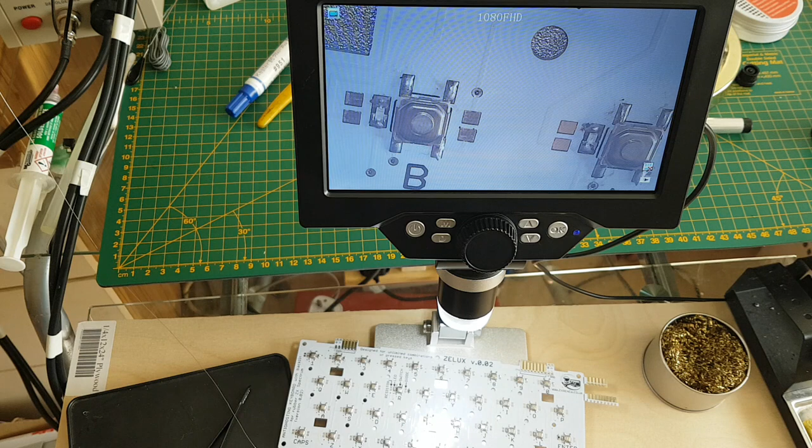Yesterday I did a live stream where you saw me soldering on the micro switches. Today I'm just going to do a little recording and show you the way I solder on the diodes. Because I've got a microscope with a 7-inch display on it, I can probably show more accurately and clearly the way to do it. I'll be soldering mainly the diodes on and maybe a couple of resistors as well.

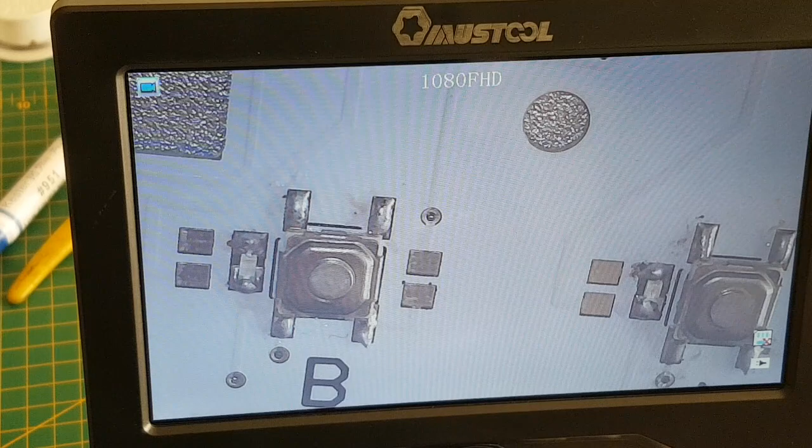So without further ado, let me enlarge the picture for you and show you a clear picture of my man at work. You're not going to need to see my hands moving, however, you will like to see the big picture of this. So if that's okay, slightly on a twisted angle, but you're going to get the general idea, so that should be fine. Once the camera steadies, there we go, that's going to be a pretty clear picture. Let me just adjust this slightly, and I'll try not to knock the camera while working. There we go, and away we go.

Right, as you can see, there's the LED keyboard just there. Just waiting for my soldering iron to warm up, which is here. And as always, good tip management is required. Just give a nice good clean tip. That way you have no issues in a bit.

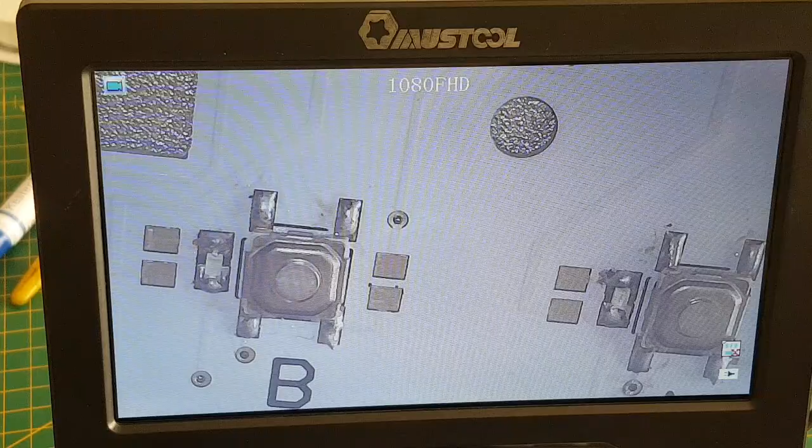Now, because I'm doing the diodes today, I'm going to get some diodes out ready. Once I find where I put them, that is. I do prepare these things, you know. And I think that these are the... Yep, the diodes, as you can see there.

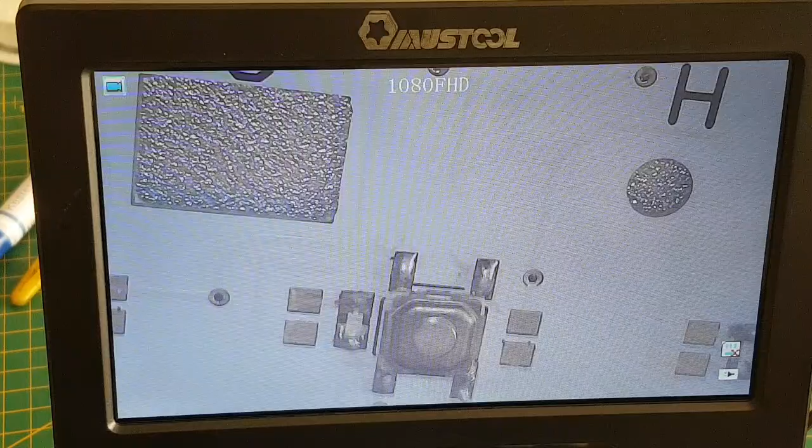They're indicated with their polarity. The line is the one that you need to put exactly on the board. Let me show you on the board. You see the line just there, indicated just there. Well, that basically is telling you to put this sort of that way round. Yeah, so you're going to be looking at doing that.

What I tend to do is I get these all ready by placing them out a little bit before soldering them on. So what I'll do here is I've got my little tray, a little black tray. I know you can't see much in a moment, but I'll just leave you that picture a minute while I just open them. Open a few diodes up really. I've never lost a single component in doing this, and I'm not going to plan to do it today just because I'm streaming live. There we go, that's better.

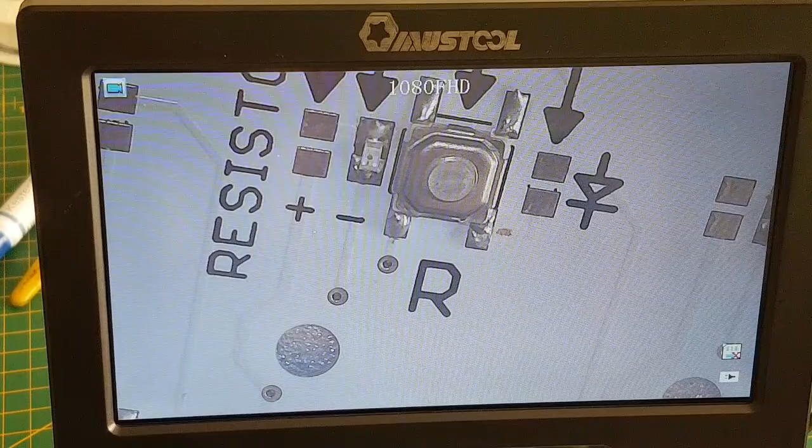Now, there's the components that I'm soldering in, and what I'll do is I'll twist them so they're all facing the right way for me to pick up. I mean, I can see with my bare eyes which way they've got to go. I don't need the microscope to do this, of course. I'm only putting the microscope there to give you a clearer picture of what I'm doing. So once I've turned a few over, that's it, ready. And ooh, there's one over there, isn't there? There we go. Then I'm ready to pick them up. So I'll just move that out of the way for now.

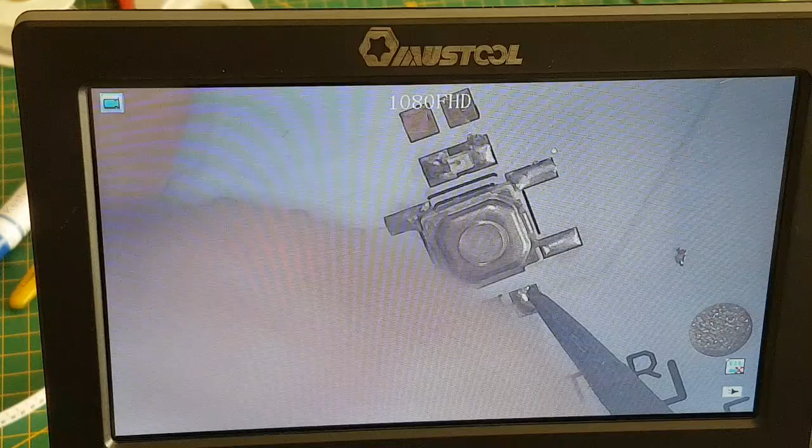We'll just start with E because he's in the picture. Simple trick to do this is to get your soldering iron. Let me just free the wire. I've got the wire trapped there for a minute, and drop it onto the pad. Just give it a second or two to heat the pad up. Then place the solder up to it, and it'll fill the pad. Whoops. Quite nicely. Once I get it in place, there we go. See that? And you get a nice little blob there.

Once you've got that blob, just add a bit more solder to that, just to make sure. It doesn't matter how much solder you add, you can't really go over the top. There we go, that's better. That's a better blob, isn't it? Little blob of solder there. Then using my tweezers, which are these devices here. It's always good to have a good pair of tweezers, especially, you know, try not to get them magnetised.

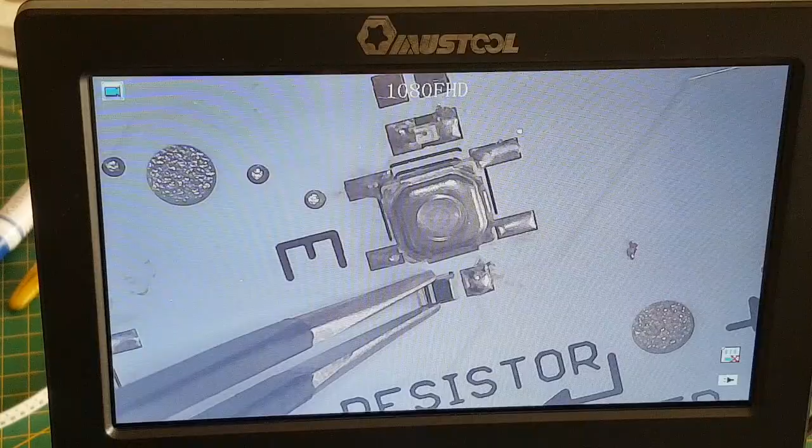Now, the important thing is to get it in the right direction. Place it down on your... Yeah. Now, the simple thing is just to plonk the iron straight on top of that blob of solder, like so. And as soon as it goes flux, see, just shove that in, do it like that, and then just pull your solder away, and it'll dry. And you can see how strong it is. I'm just going to move that. You know you've got a good grip, but if you want to be a perfectionist, you can really fill the pad up with it.

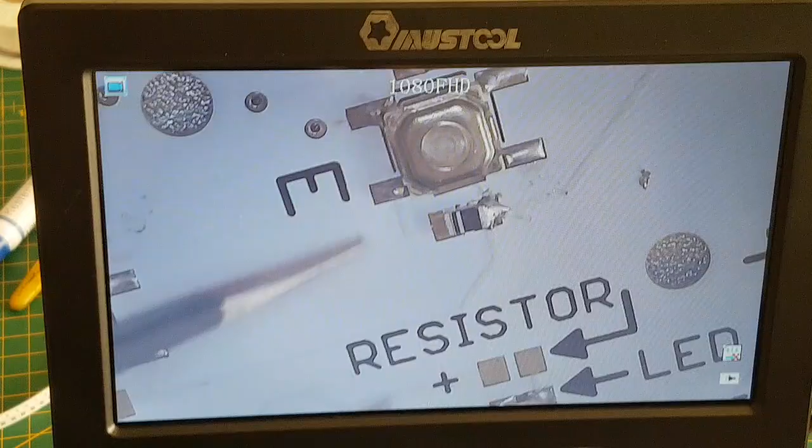Anyway, that's a good strong hold. Under the microscope, that looks like it's a spike, but if you put your finger or thumb on it, it's as flat as it comes. It looks like a spike, doesn't it? But it's not—it's just the way I've pulled the soldering iron away.

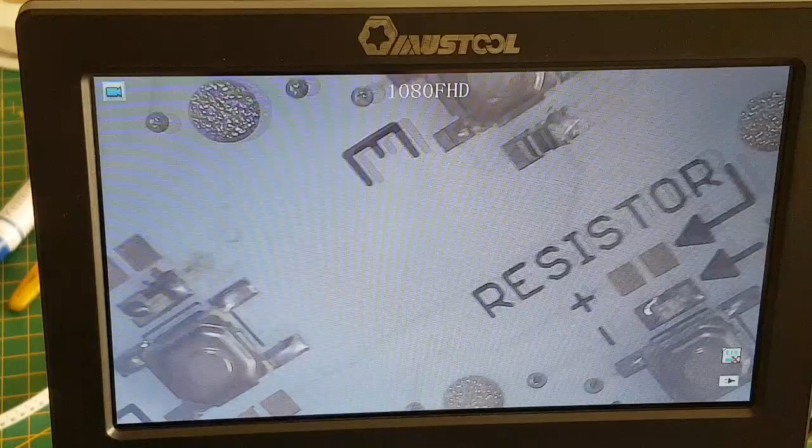So that was the easy part of that bit. The harder part, of course—you rotate it round to suit yourself—is doing the other side. Now there's a couple of ways to do this. For instance, I tend to put the solder up to it like that, place the soldering iron on top before it, and then just go into it like that.

And you can just rub it across a little bit, and then you get a nice—see that? Once that side's done, if you want to reflow that side, you can. And there you go, you got a nice little ramp either side there. So that's that one.

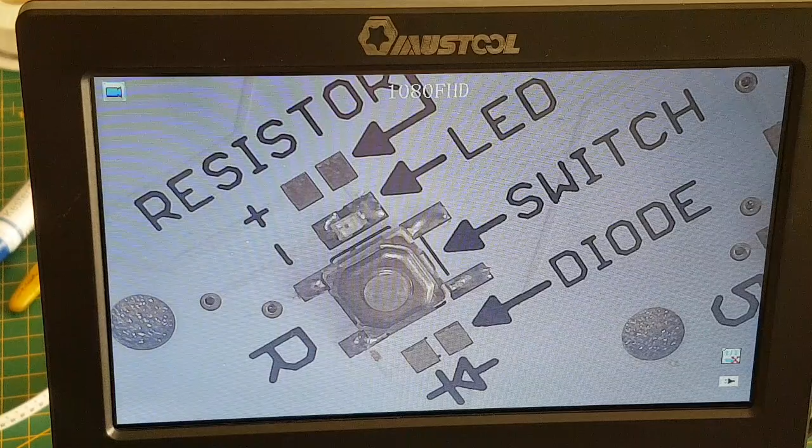Once again, we're going to move into that little diagram you get. The resistor I'm going to put in—each resistor varies to what colour LED you're using. You'll have a different resistor. For instance, the blue LED uses a different ohms resistor, and so on and so forth. But you'll see that as I go along.

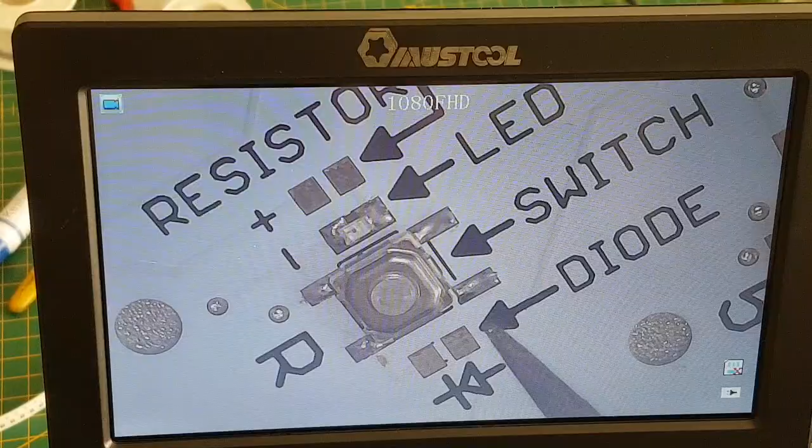So once again, get your soldering iron in place, drop that down there, heat up the pad for a few seconds, in you go—see how it fills the pad up—and pull away. And then you've got a nice little blob of solder.

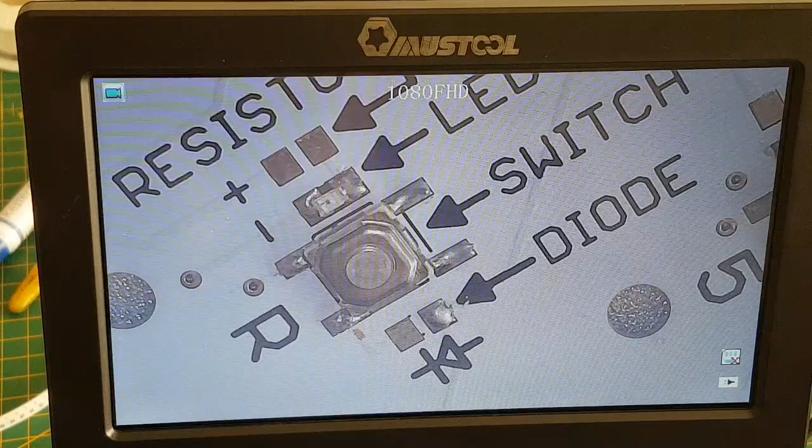So I've got sticky fingers today. It's all the flux—it gets on your fingers. It's not only the soldering tip you have to clean—sometimes you have to clean your fingers as well.

Okay, now place that in place ready. Preparation, as always, is the key to success. Just drop that on top of there like so. As soon as you see it get molten, give it a few extra seconds if you want. Just shove it in, pull away. And there you go, look—a nice, good, solid, strong hold. That's good continuity there.

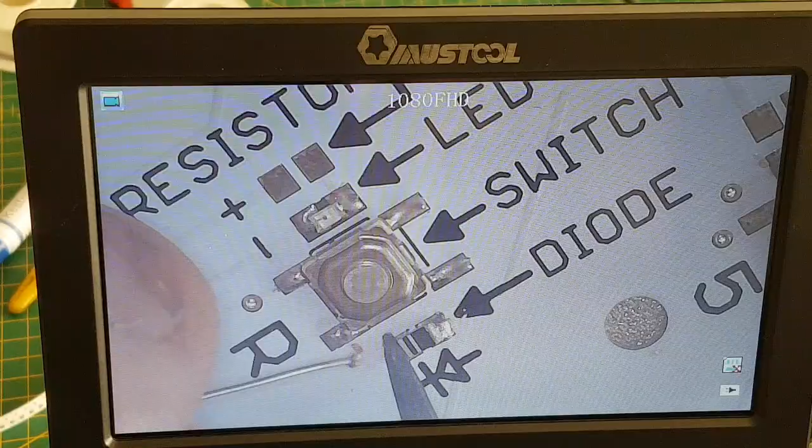And there we go. So it's as easy as that. Move on to the next one.

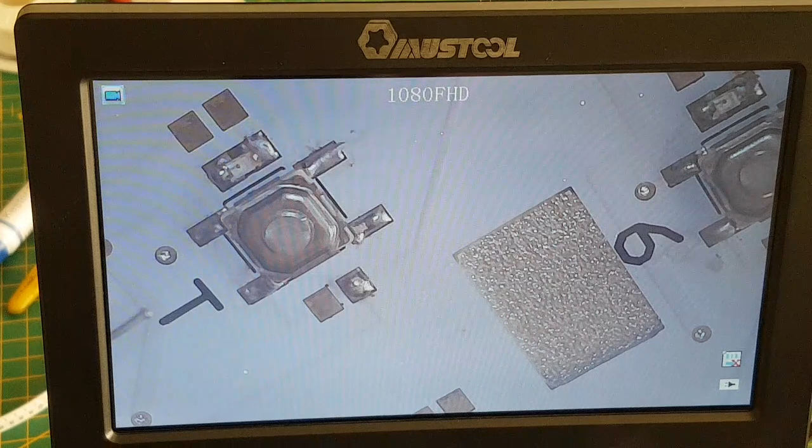Because I've got all these diodes twisted round the right way, it only takes me a few seconds to pick each one up. Once you've done that, I'm on T. Oops, just trace that one later. Oh, there it is—that was easy, wasn't it? It's only landed back in the tray.

Oops, try not to bash the camera too often with my head. Drop that down there, push it in, pull away. Oh, there you go—that's nicely done.

You can go all the way along and solder one side at a time, but I tend to just do them as I go along. So you can use the tip tin—it sort of flows round your soldering iron into place. And there's your T done.

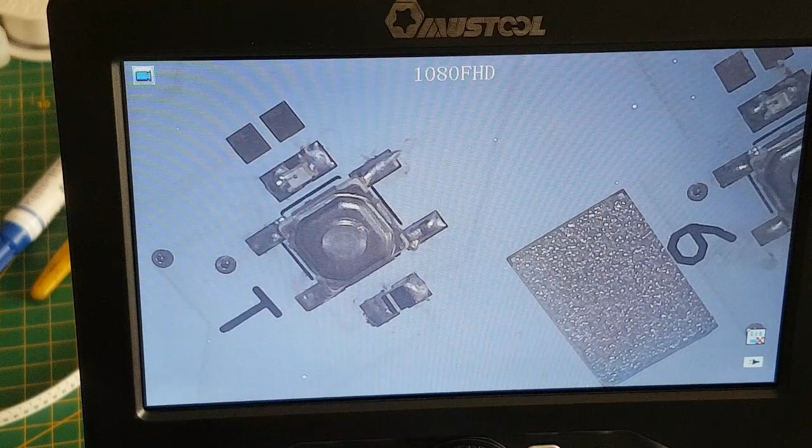So let's move down to Y—and why not, sorry about the pun. Once again, soldering iron onto the pad, take your solder up to fill the pad. Don't be scared to shove the solder on—plenty of, a good blob of solder doesn't hurt anything.

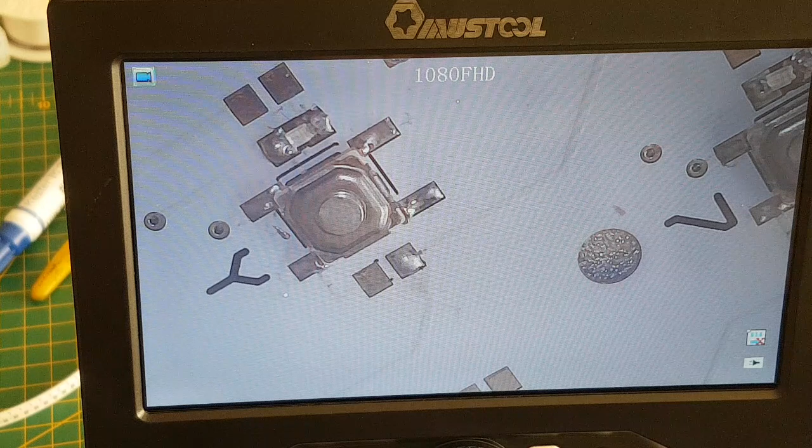Just turn my tray with my diodes on around a little bit. I've got the tray on a slight slope, you see—makes it easy. Oops, not happy with that.

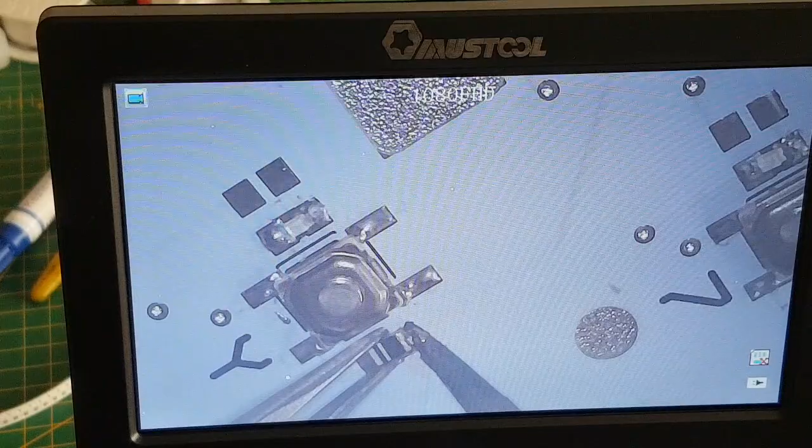I like my tweezers to be at the end, like that—see that, I've got it at the end. You can see the little silver pad that's going to be biting into this solder in a minute. There we go—it's nicely done.

Remember, once you get it tacked into place, you can always reflow it if you wish. There we go, and I'll just reflow that for you. Whoops, we don't want a spike, do we? There we go—it's a nice little ramp either side. And that's what you aim to get.

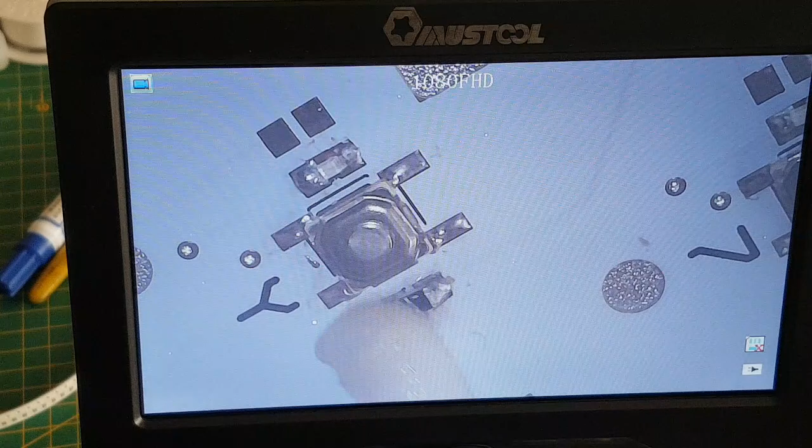And of course all the flux residue—if I quickly show you, we'll clean off with a bit of IPA. Have I got any buds handy? I have indeed, yeah—dirty ones at that. So it looks messy, doesn't it? Yeah, but once you've—where are we? White. Once you get a bit of IPA in it, look, it'll clean up just nice and it'll look really smart.

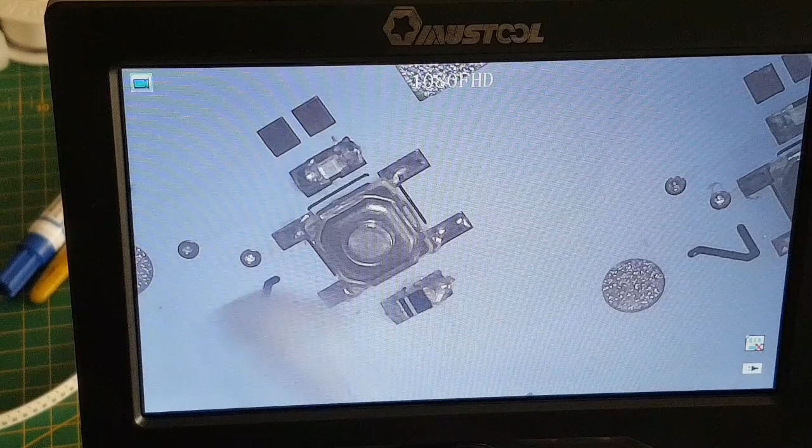There we go. I'm going to put them in a bath in a bit, and of course dry it off a little bit.

Once you've done that, if you want to reflow anything - I'm looking at that LED, there's a little spike there. I don't think it's going to affect anything... actually it's not really a spike, there's nothing there, it's just a scratch on the board. There's a little track that goes across there. Let me show you - there's a little track that goes from that pad to there, and then down there. So you go up there, that hits your resistor, there's your resistance into your LED, down, and that's your test hole there. There's a little track there, and the white has come away, revealing the track. Other than that, the LED is nice.

I can actually show you that working in a minute. I haven't changed my battery yet in my meter, so it shouldn't do it any harm.

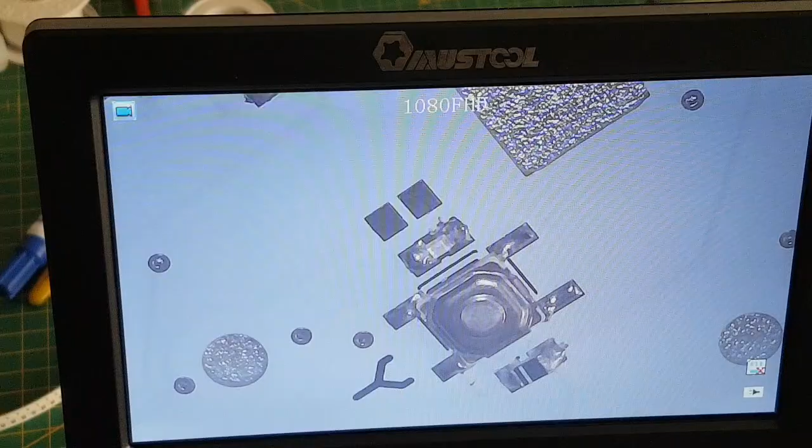Where are we? We're on Y? Okay, so let's just put the positive there. And there's the test hole for that, and there's your light - that one's the green one.

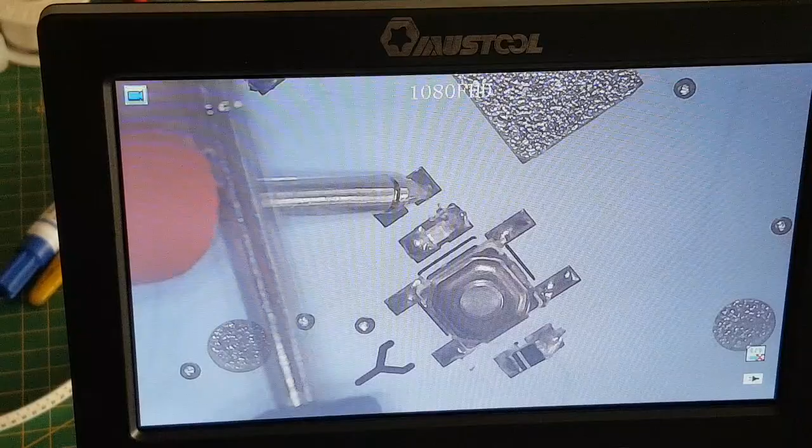That's the way I test the LEDs. The battery is absolutely gone in my multimeter, that's why even that little LED there wasn't even enough power. But that's good, because I don't want to burn any LEDs out, so I like a flat battery. Otherwise there could be too much power out of a 9-volt battery - you don't exactly get a true 9 volts, you probably get about 3.5 volts through it, so it's not a problem.

Don't quote me on that, of course. I'm not 100% sure, I didn't make it.

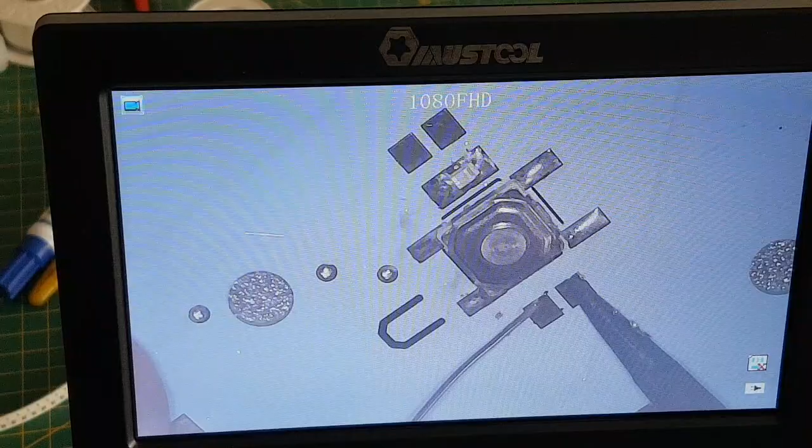Whoops, don't worry about that little bit that just flicked off, that will just blow away. Look, you just blow it away. Well, almost. Where were we? We're on you, aren't we? We're on you.

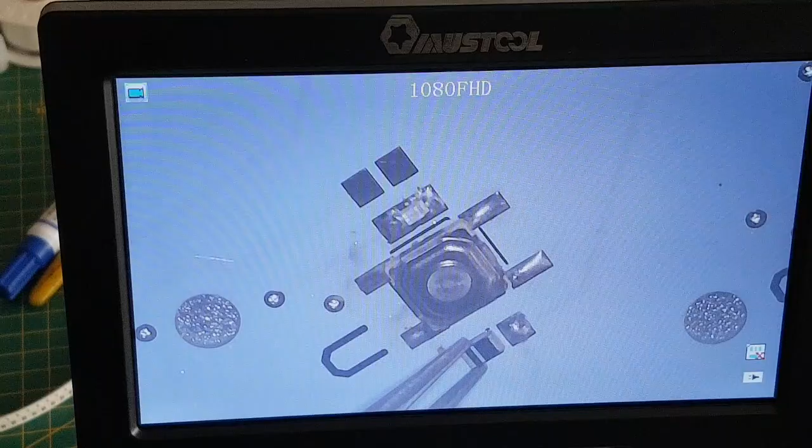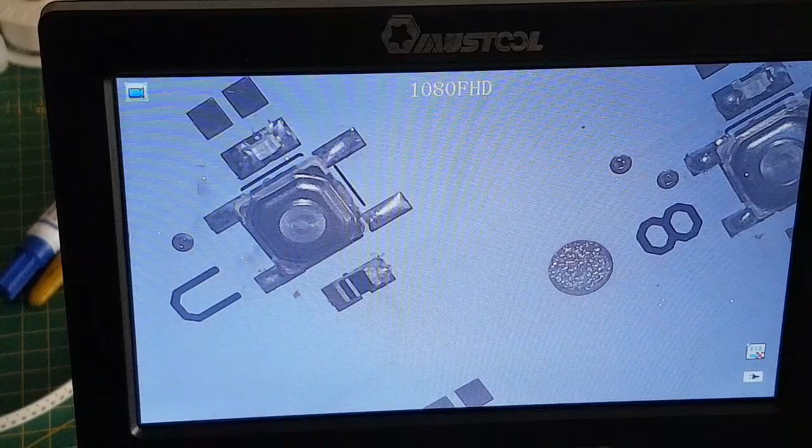As I say, preparation's key to success. Get that ready in place. What I do here is apply a little bit of force when pressing down, because nothing's actually strapped down. Let me put that in the centre. Drop your iron on top of your solder, let it get molten, and once it's molten, push that in - you can push it gently or give it a good shove, then pull away. Once you've got the grip, look - nice grip. All these little solder bits that might flick off, you can clean up later with some IPA.

There you go, that's a lovely job, isn't it? Beautiful - much like myself.

Does he love himself, this kid? No, I like being ugly.

Right. People let me out in junctions when they see me, they feel sorry for me.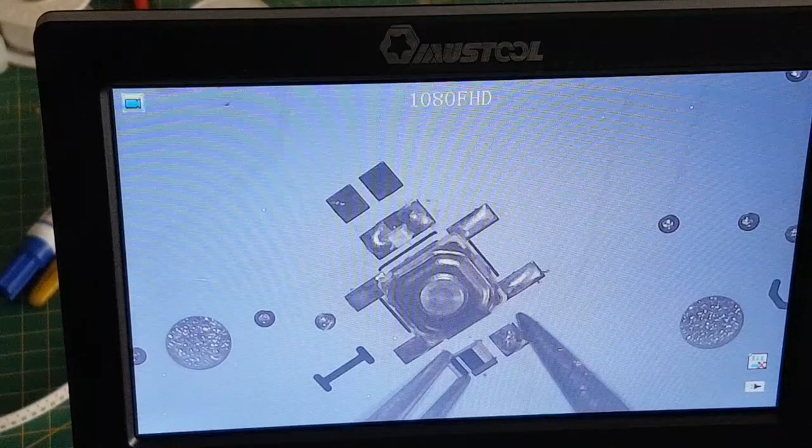There we go, just let it heat up again. Oh, it's doing nicely actually. The only problem I've got is I'm slipping all over the shop. See how it suddenly instantly takes? I like that.

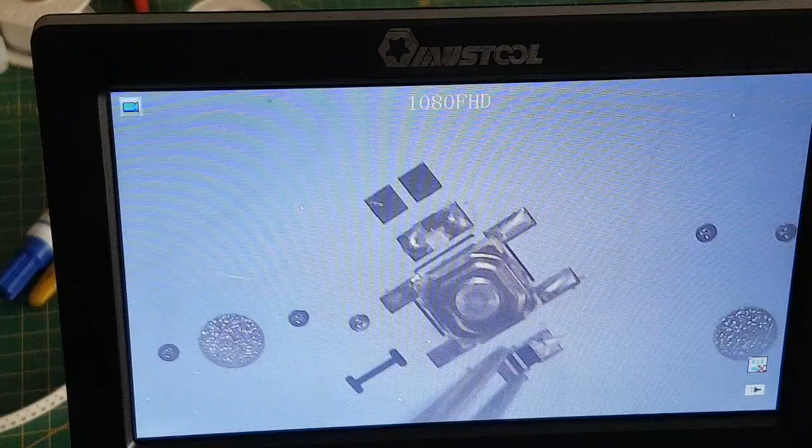I've got my solder wrapped around all sorts here. Well, bit of an eye opener this, isn't it, eh?

Well, I wasn't pleased with that, that didn't go too well, did it? There we go, that's better. Just reflow that other side. We'll leave a spike there for you - there's no spike, it's flat, it looks like there is but it isn't, it's just the last little bit. Don't forget, we're under a very powerful microscope, and it can make anything look hideous, but to the naked eye it's a really good job.

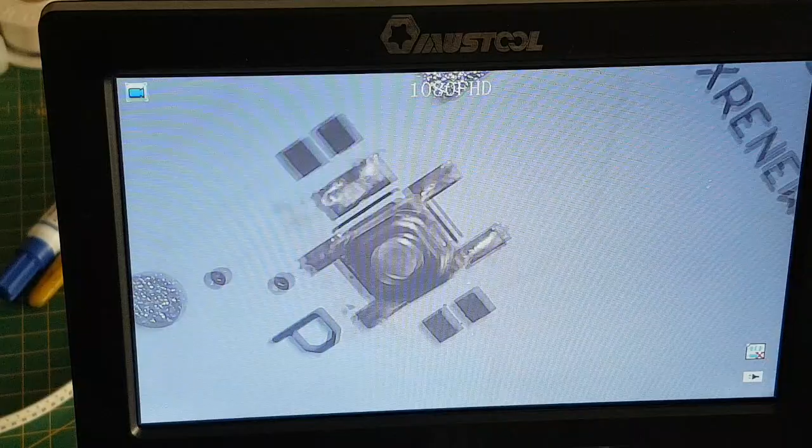Now, on the pad, fill the pad up with solder. There you go, so that's the way it should do. You can go along and do a few if you want - it's good to do it that way as well because your soldering iron stays nice and fluxy. There we go, two ready to do.

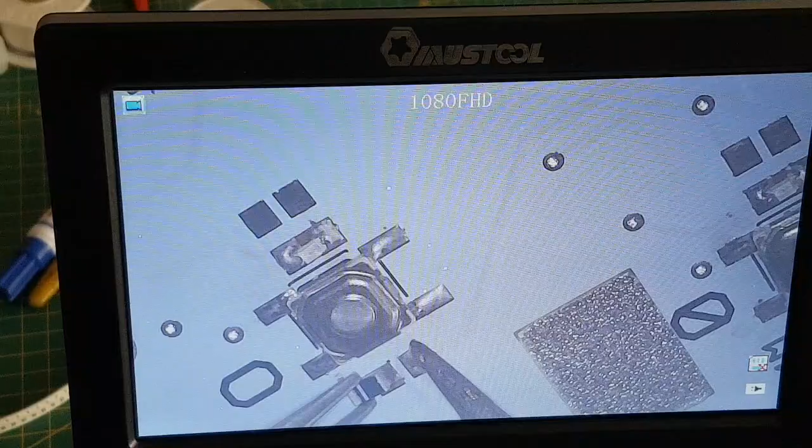To be fair, diodes, the smaller components, are now quite resilient to heat, so you do have time. But don't forget, you're not actually putting heat on the diode here, you're putting it on the pad. So your diode just simply goes in, like so, and pull that away. Once you get your soldering iron in place, you push it up to your soldering iron, and it sort of acts as a stopper.

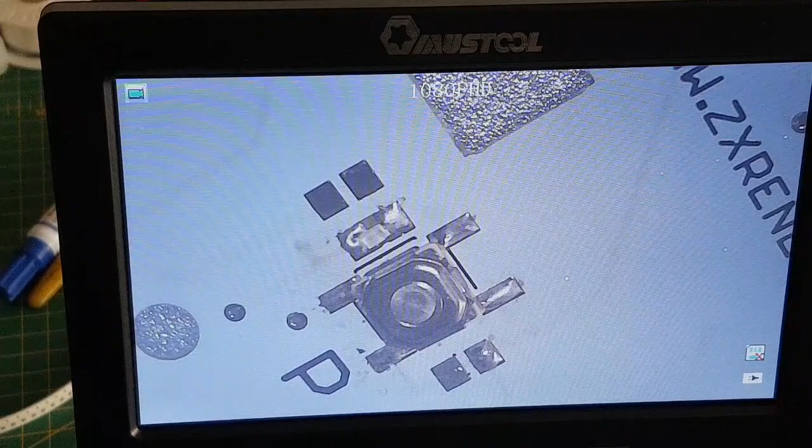Doing more gaming videos. Tried a little live stream last night for the first time in ages, just me playing various games. I was in a good mood.

It was a great achievement on the Kickstarter to get 1.5 mil with still 3 days to go, and now it's counting down in the hours. That's a nice result, a lovely little result there.

That is actually quite good soldering on that LED, believe it or not, even though it looks so bad under a microscope. It's got really good continuity. With the LED I try to put as little solder on as possible, because big blobs of solder either side will stop the light from escaping. The more light they can get out, the better the effect on the keyboard.

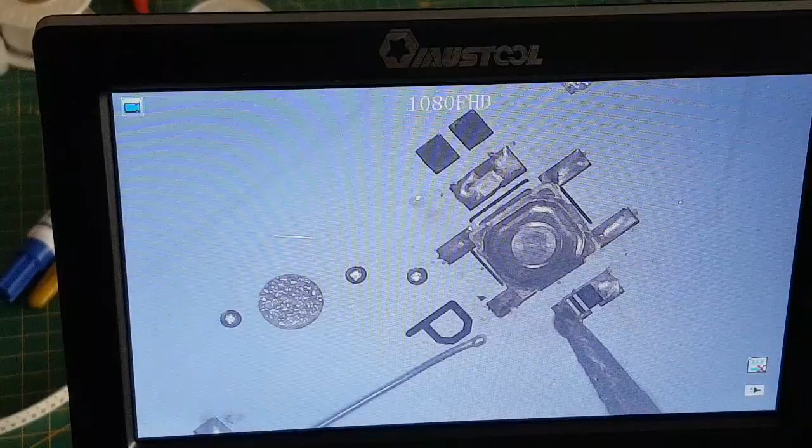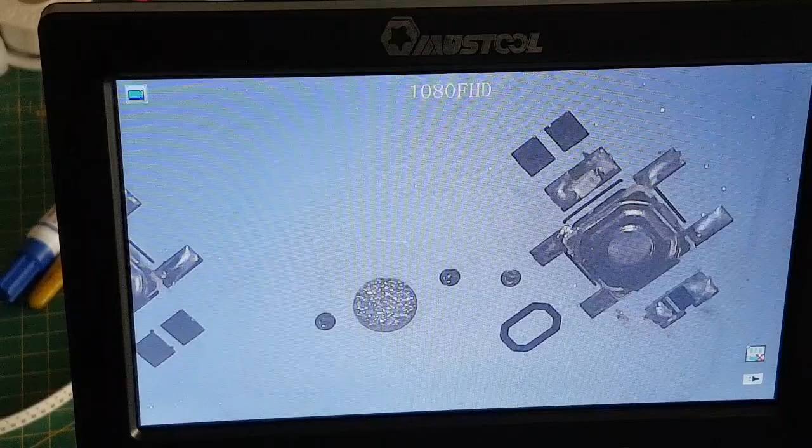I'll have a peep, please, Bob. Oh, that one didn't take, but don't worry - if there's solder on the soldering iron, it'll take it off and put it on. Add a little bit more to that, I wasn't too happy with that. There you go, a little wiggle left and right helps sometimes as well. You can see the line, so you can tell they're all in the right way.

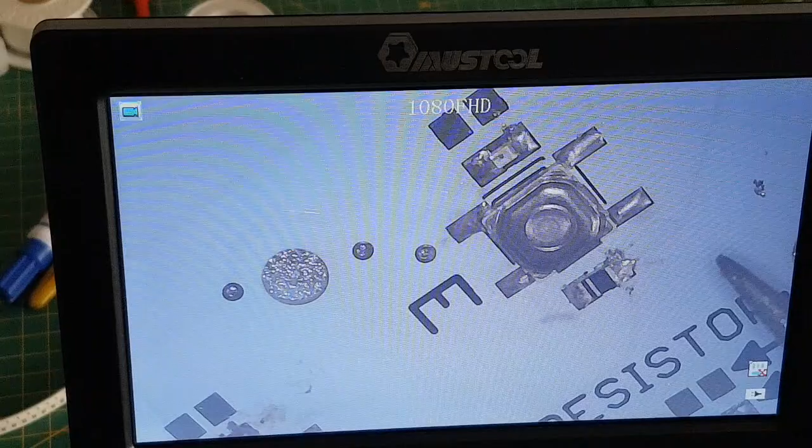That looks a bit messy, doesn't it? But as I say, once you clean it with IPA - if you have any doubts at all that it's clean, give it a good clean with the IPA using an earbud, and that'll give you a better picture of how clean it is.

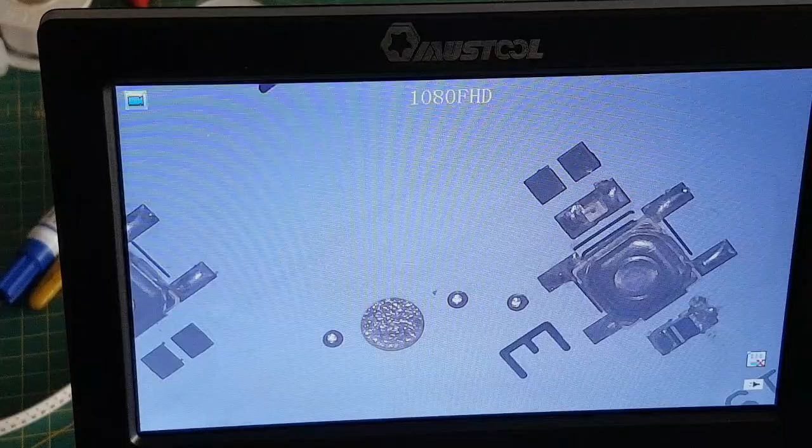Once I put it in the little bath that I've got, you can see the track there. Let me just show you - see that there? There's a little bit of the track underneath that goes across, and when you've soldered that, a little bit flaked off, that's all, a bit of the shielding, but that doesn't matter because it can be linked quite frankly.

But that's that done, so let's have a look at what we've got left to do. We've got a W.

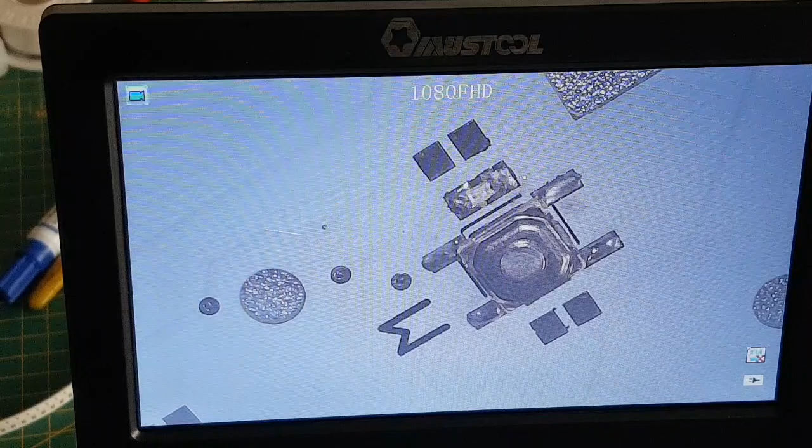Now there we go, see how that just took away the solder that was bridged against the two there.

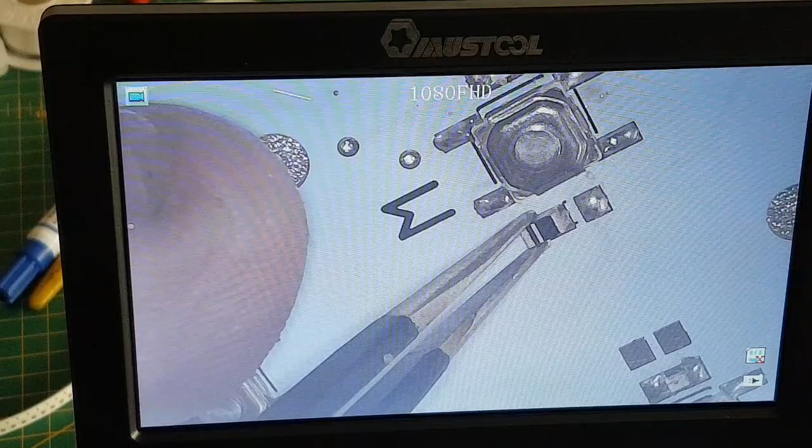And if you enjoy it and people like listening to your content, then that's good, some people do. For instance, I do like watching Techmoan, I think it is - he talks about his different hi-fi equipment and old forgotten sound formats, so I've subscribed to him. I do like watching Nostalgia Nerd too, although he almost looks a bit too professional. I like a bit more raw, bare bones, what people are doing for themselves. He's good, don't get me wrong.

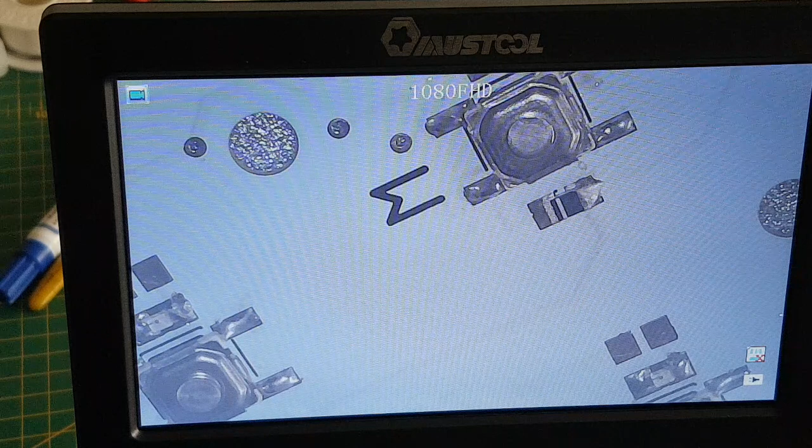Common sense is something you either got or you haven't, because there are a few idiots around unfortunately. When I say that, people who decide to go and burn 5G masts because they think it's the cause of the coronavirus - well, let's be honest, they're idiots. So I like people that talk sense.

And where are we, what letter are we? Oh, Q. Oh, that's cute, sorry about that. Oh, where's my solder gun?

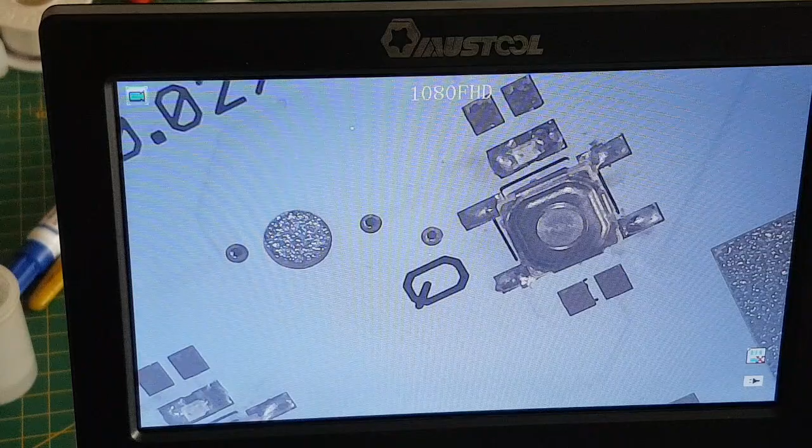Before I add the solder to that, I need to cough, excuse me please. Don't worry, you don't need to have a mask on if you're an idiot watching - oh no, I'm going to catch corona over the internet. No, you're not, because first of all I haven't got it, and secondly you can't get it through a screen. There's probably somebody out there that actually thinks you could get coronavirus from somebody coughing on TV. There's always an idiot somewhere.

Most of the people that I work with think I'm an idiot. Of course they don't. I don't think I'm that intelligent to be an idiot.

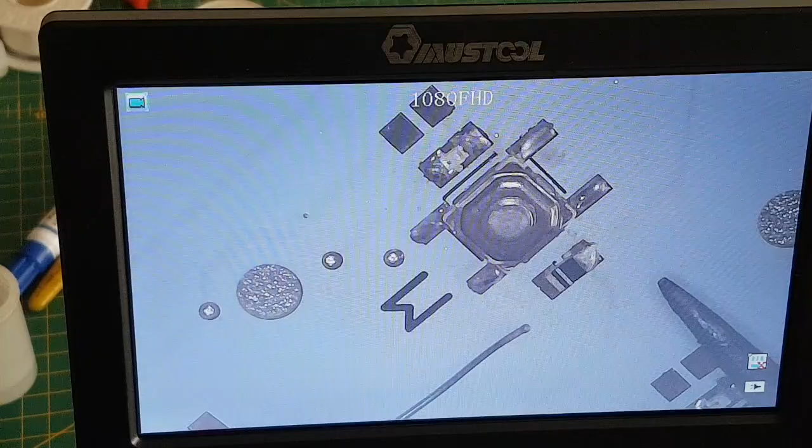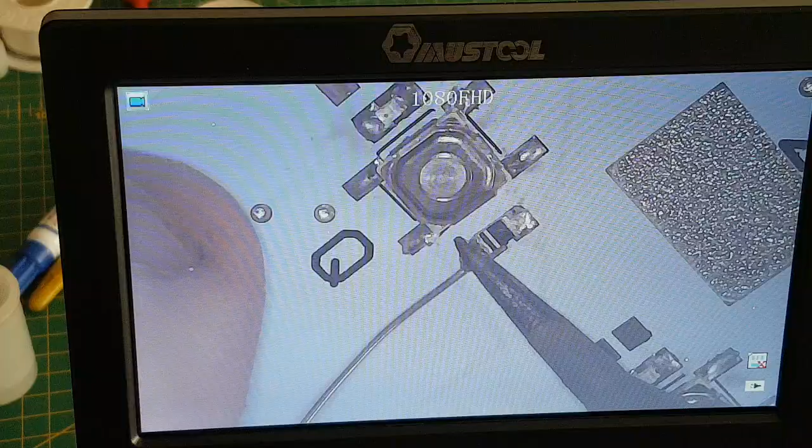Right, here we go. It's going rather well, isn't it? Let's get the diodes on. I'm going to get the resistors in place. I'll at least do a couple of them because I don't want to make this video too long. That was nicely done. See how beautifully that is done. Nicely done, nicely done, well done, Wayne.

So it took you years, you're getting quite good at this. These kits are from Pete from ZX Renew, just showing you how easy they are to do. They are enjoyable, without doubt.

If you want to spend 5 minutes relaxing, just solder one of these up. It's, you know, I enjoy it. I don't get a backache or a neck ache because I'm not leaning down anymore, but I'm a fairly fit lad for my age. Fit as in healthy, not in looks.

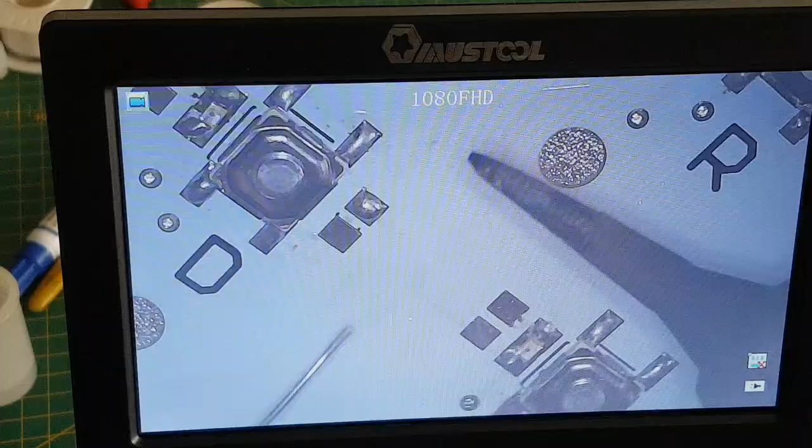Bald is beautiful. The way I explain baldness to people is, listen, we've evolved from apes. And apes had the maximum amount of hair, and bald people have got the minimum amount of hair. So that just means I'm further along the evolutionary scale than they are. So hairy people out there, you're a few million years behind me. Or 1,000. A few thousand years behind me. If you've got hair, you're behind the times.

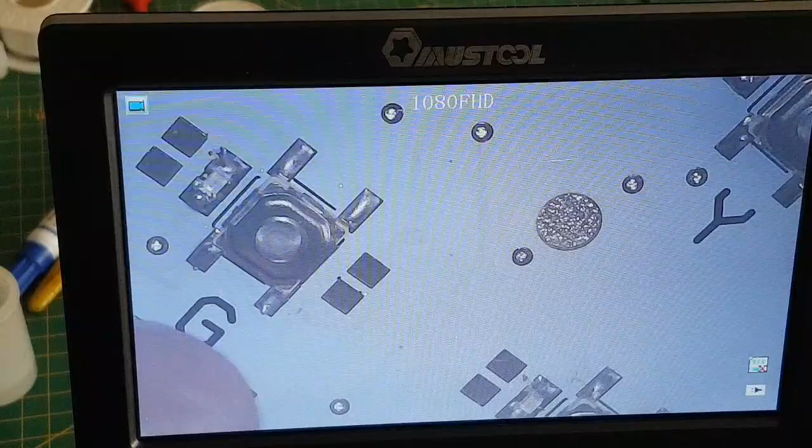I want to know, somebody said to me, you either go bald and balmy or grey. Is that right? Bald and balmy, or grey. So why do the bald people get the balmy as well? At least the grey people can dye their hair, can't they? Oh well.

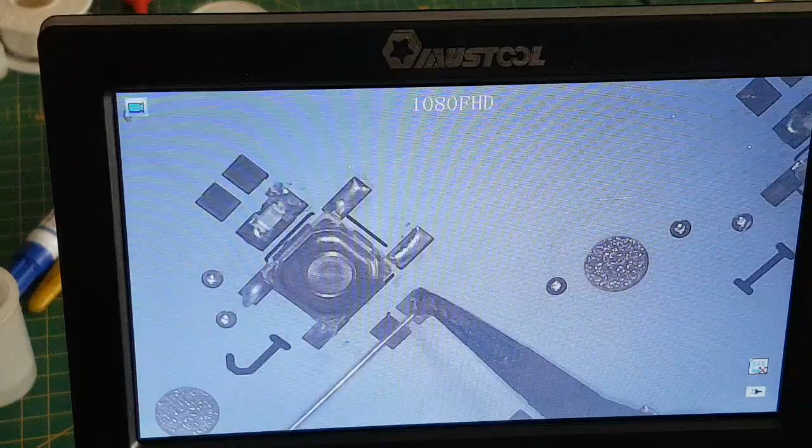I'm just tinning one pad, ready, so as I don't have to worry about doing it in a minute.

Lovely. I had to say a word related to weld, didn't I? Hey. I know I shouldn't entertain that. I do apologise, it's just my sense of humour. It's ridiculously stupid, like myself.

So here we go, look, I've done each one, one there, one there, one there. Whoops, one there. The problem is there's like a bar on this microscope that gets in the way sometimes, you know. Once again, preparation.

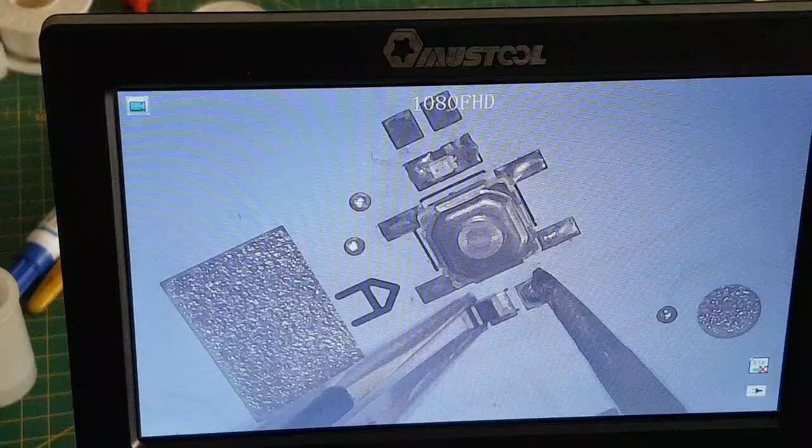Where are we? We're on S, are we? Have I done an A? I haven't done A yet. Okay, get that into place. Bring your soldering iron into place, drop it down. As soon as you see it go molten, in, out. There you go, nicely done. Just reflow that, shall I? In, out. There you go. That's better, much better.

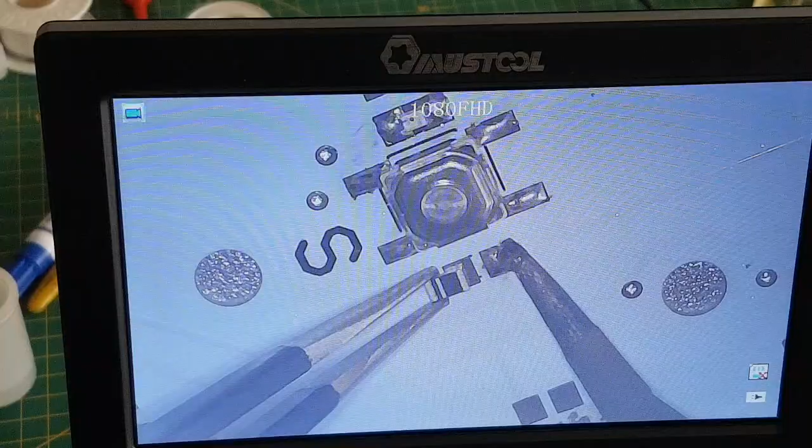If you're wondering why I'm not doing it as fast as possible, I haven't. I normally put all these in the right way around, don't I? In. Of course, you don't have to re-add solder once you've got it in.

Oh, that one's going to get... Oh no, I can just about get to D, can't I? Hold on, D is a bit awkward, the bar's in the way. Why is D awkward? Ah, okay, let's just do it that way. That's it, that'll do me. Doesn't look to be enough solder on that, but we'll find out in a moment.

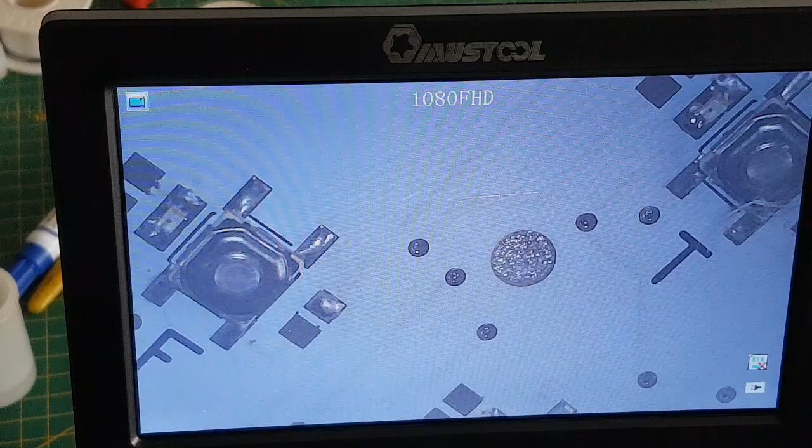That's nicely done, and I've done it for D. This one's going to be a fabulous job. See what I did there? Fantastic.

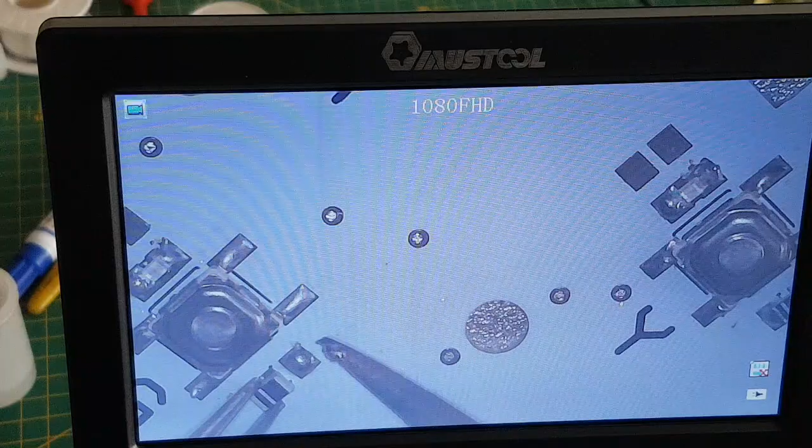Okay, I'm on the G for the diode. Could be a good job or a great job. There you go, it's a great job.

And we're going to get one for H. I'm just twisting the diode round at the moment. In we go, away we go. Beautiful, much like myself. So, let's have a look.

Oops, I've just headbutted the camera again. There we go, shall we do that? A? No, I'm saying I'm doing A, not asking a question.

Whoops, turn it. So you can do that as well, if you've got solder on the tip of the soldering iron, you know. Whoops. The D was the hard one to get to, wasn't it? Didn't need to put solder on that then. Sometimes you've got enough solder on the soldering iron itself.

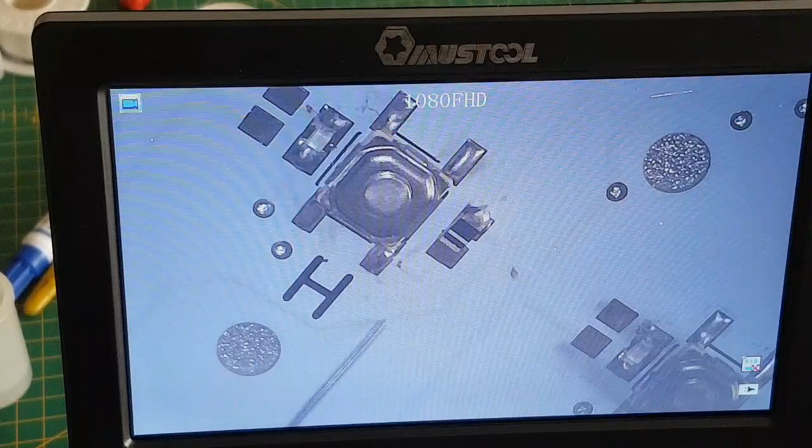Just pulling a bit more solder through my fingers. Yeah, that's nicely done.

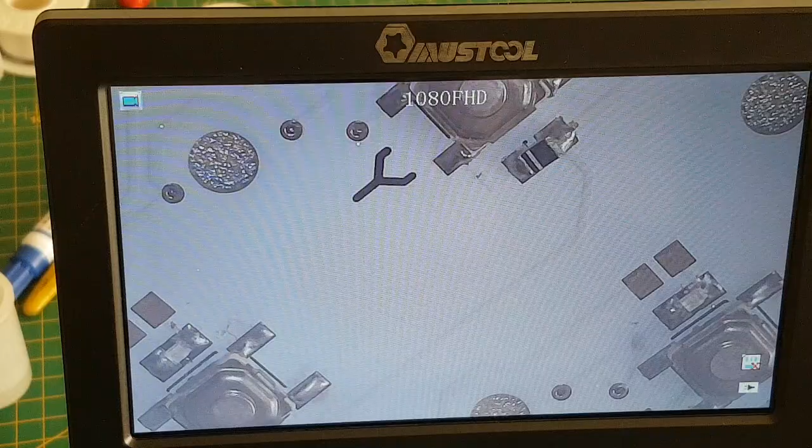JJ, so I've got to get some more diodes out, have I? Yep, got a few more diodes to put out yet, quite a few to do actually. But I won't concentrate on the diodes now. I'm going to put a few resistors in, show you a few resistors before the video gets too long. It's already up to 31 minutes and you don't want to spend all day watching me soldering resistors in. You want to see me doing something else, so something else is what I'm going to do.

Where are we? We've done H, we're up to J. Let's plonk that there, in, out. There we go, beautiful. Better kick along with this. Oh dear.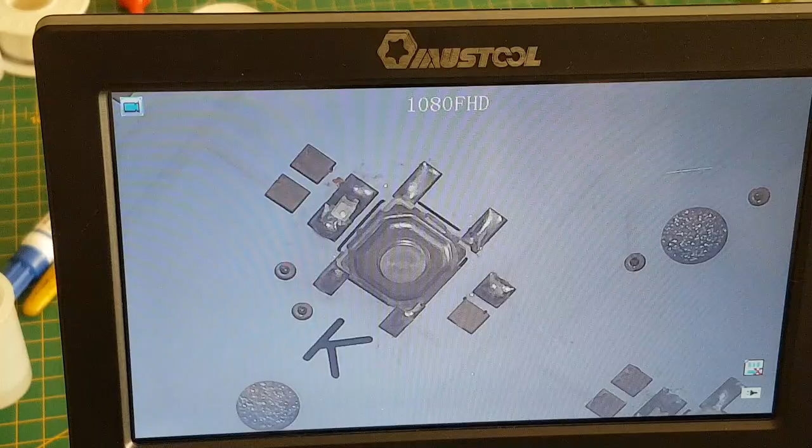I know what you're thinking - why are you still watching? And I'm thinking the same.

Beautiful, beautiful.

I think that's my phone's alarm telling me to wake up. Good timing that, isn't it? Lovely timing actually, got one in, got one in. Yeah, lovely timing. Right, where are we?

Didn't I do enter last time? Ah, oh yes. Oops, no, that doesn't look right, does it? Oh, I see, I just need to reach up and press it down. There we go.

Yeah, it was standing up a touch. It's standing proud, is it? No, it looks like it's standing proud, but it's not - it's quite level.

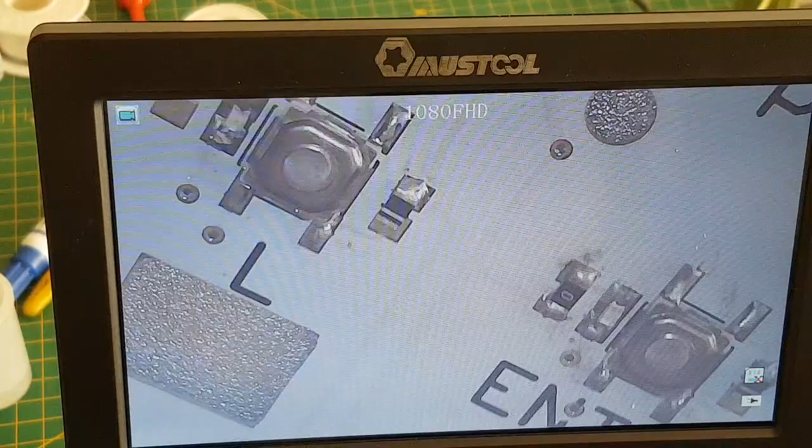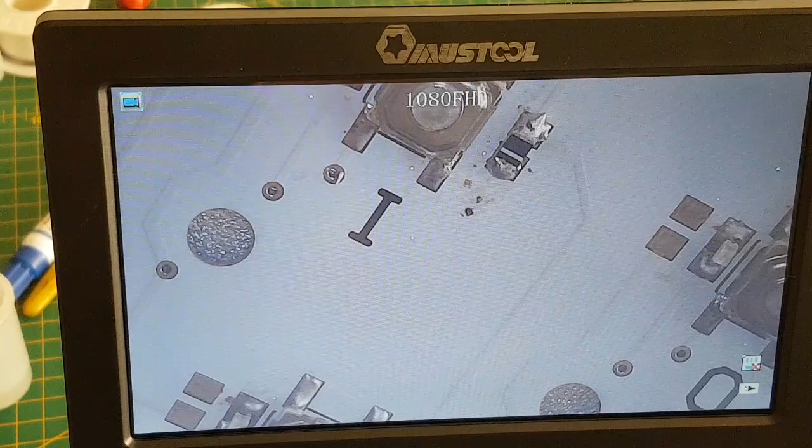Just a minute, let me stop you from ringing please. Hello? Is this 1111? Can you ring 9999 because my finger's stuck? Oh, old joke - the days when you used to have a telephone that you put your finger in and dial. Oh dear me.

Oh, here we go. That was nicely done, wasn't it? You know, on the microscope you sometimes can't tell it, but the solder is actually facing upright, and I'm trying to put it to the ends and I'm nowhere near it. There we go. I thought there was enough solder on there, sorry, my mistake. There we go.

Now when it starts to run up the soldering iron, you've got to give your soldering iron a clean, because the solder wants to run up to the hottest part as always.

Have I done J? No, I haven't, have I? There we go. Oh, I don't like that. There we go, reflow it, nicely done. Okay, have I done K? No, I haven't.

See how it took then? It takes it off the soldering iron if you get it right. You know you've got a good connection when it just sucks it towards the pad, like that. That's what you want to do, is get it to suck towards the pad. Nicely done. And I think I've done that one, haven't I? Yes, indeed I have.

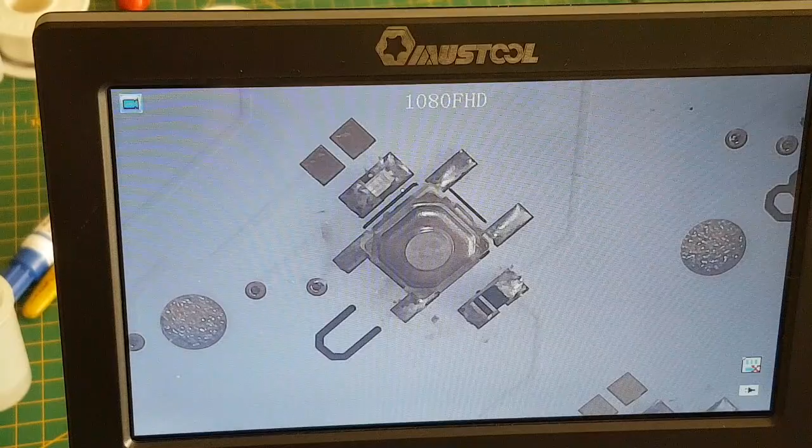And the resistors we've got, I'm going to do the red ones. I've got them marked, look - they're for red, and they are. I'll just zoom in on that for you, and I'll try and keep my hand steady. Right, here we go - whoops, wrong way.

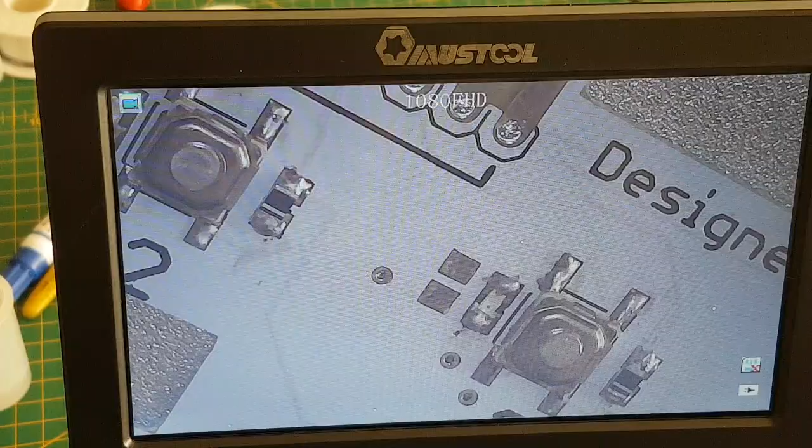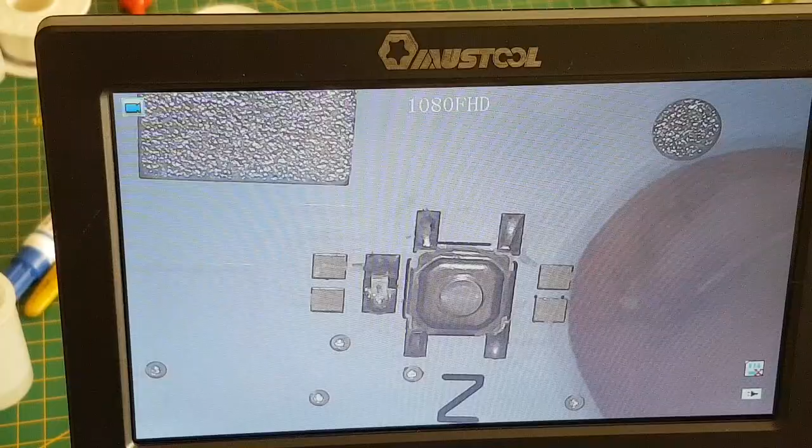There we go, and that's for the red, which are the red ones, which is going to be caps. And if you're not sure which ones are red, just test them, doesn't hurt - for instance, like the caps one. Have we done caps yet? There we go, there's caps, look. There you go, there's red there. A should be red. S should be red, I believe - no, I don't think S is red, sorry. W should be red.

Yep, there's my battery gone in my multimeter. And then it should be 3, 2, 1 - 3, 2, and I bet you know what I'm going to say next, don't you? Do we get a dusty bin? Only if you make a real mess of it - gets to go in the bin.

There you go, that also lets you know that you've got a good connection between there to there. That looks a bit of a bulge, but it's not, it's quite level to there. So yeah, if you're not sure, do that, test it that way - that way you know that you're putting the right resistor in the right place.

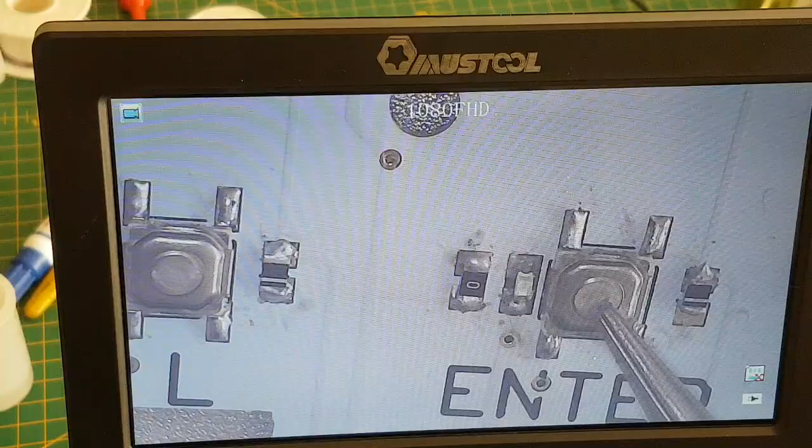Because each different LED has a different type of resistor. For instance, the blue is the 0 ohms, and I can always remember that one. I think I've done one already - see, there's the 0 ohms resistor there. Then you've got, obviously, that is your LED with your micro switch. If you notice, you've got lines around the outside to get it clearly in place.

And then you've got your diode, which, let me just give it a quick check - yeah, I thought enter was soldered as well, but it doesn't look as if there's enough solder there, does it? But there is.

Let's see if you get a nice clear picture. How's that? I'm going to make sure 100%. Oh yeah, you can see clearly there's enough solder there.

So what we're going to do, we're going to do the red, shall we say? But before we do the red, we're just going to use up these last two loose diodes on caps, for instance. There's caps. Remember, iron against, it's going to be the same principle.

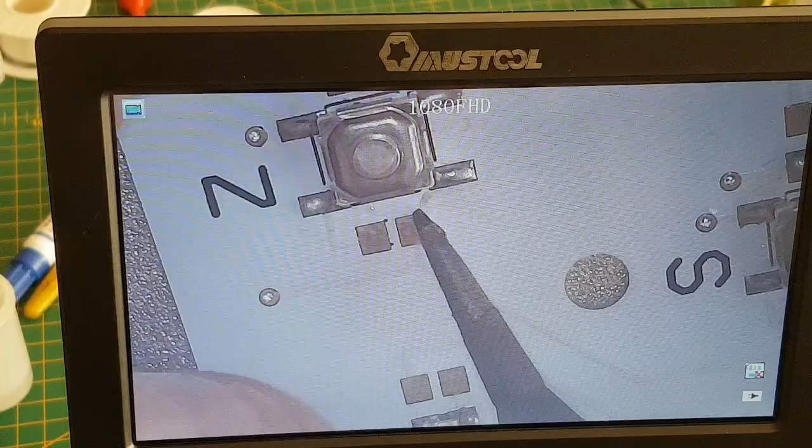Always remember you can rotate the board round to suit you. Everyone's slightly different. See that? My solder's curled up there and it just looks like it's in place and it's not. There we go.

How's that? So just turn me diodes over. Happy little diodes. Happy little diodes.

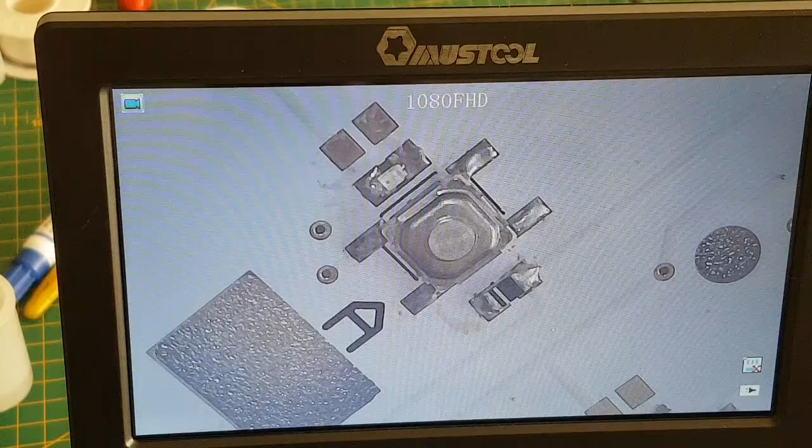That's somebody's YouTube channel, isn't it? If I remember rightly, where did I hear that? Happy little diodes - oh, Ben from Byte Delight. He mentioned it on one of his shows, didn't he, on one of his little live broadcasts. I enjoy watching Ben, but he does go off a little bit on different subject matters. I like to watch him doing his soldering or talking about repairing his spectrums and toast racks, or even - I think he should place a video on the pick and place machine. I've not really got to see one of them in action because there was a Kickstarter on a budget pick and place machine that people could have got involved in a while back. I'd seen it and I didn't know what a Kickstarter was back then. I only knew what a Kickstarter was when I needed to know what a Kickstarter was.

And that was not taking, has it? Not taking this time. See, sometimes it doesn't take. Just keep - don't be afraid to keep going back. Sorry about my fingers, they're in a mess, I know. There we go. Let me just clean my soldering iron because the solder's run a little way up the tip.

I'll just stab myself. Well, at least I've sorted the wound out straight away because it was with the soldering iron I stabbed myself. So it's sort of - well, these things happen, and unfortunately for me, they happen quite regular.

Now I'm just taking out the first set of resistors for the red. And of course, remember when you do this, don't worry about which way round they go. There's no need, but it's just nice to get them all the same way, just for neatness reasons, really. There's no particular direction you need to put them in.

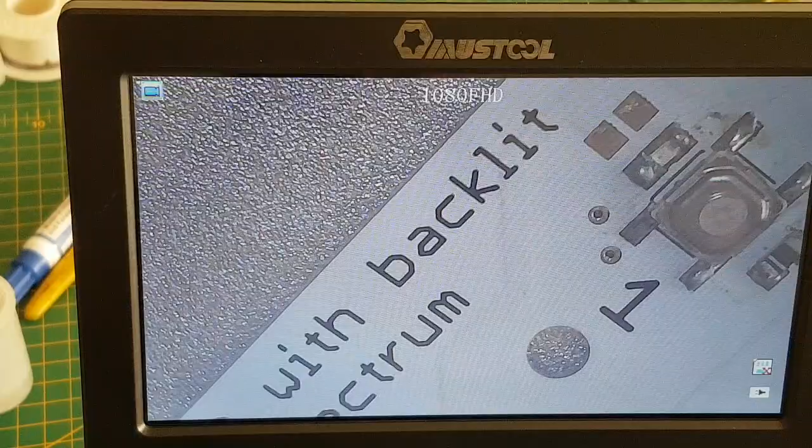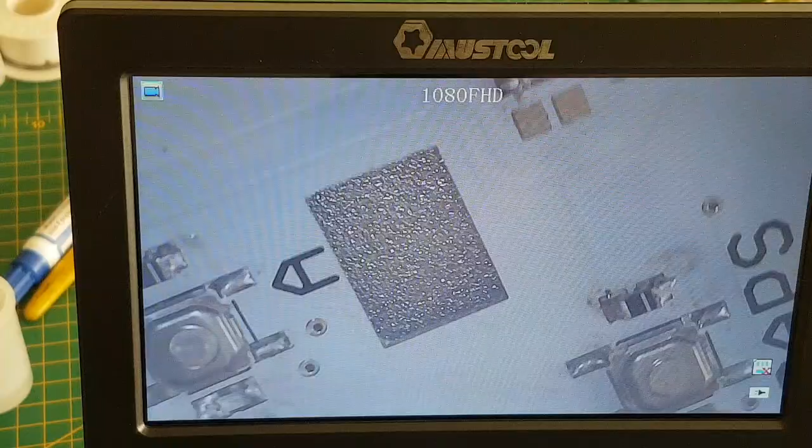Right, so we'll start with caps. Just going to turn it round so it's the other way round. That way you keep your soldering iron away from any particular components. And if you've got a little weight, like so, just weigh the board down a little bit because it's hanging off at the back.

Okay, so once again, tin - there we go, and there's more weight, look. But we don't need it for that, do we? It's A's, there's a red one. Tin, beautiful. So we've got the cap, so let's do the first resistor.

Once I get them one way around, I like to stick them all the same way. I just - extra like that. So now, because they're - I don't know, shall I have double O down? Have the one up. Yep, there we go. I'm going to put double O down.

And once again, drop your soldering iron on top of that once it goes molten. Push that against your soldering iron, pull your soldering iron away, and you'll get a good grip. If you want to reflow it, now's your time. Oops, that's better.